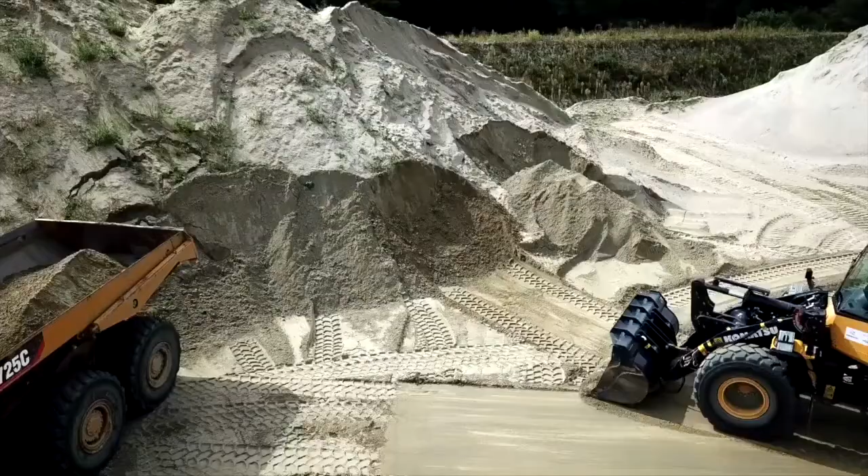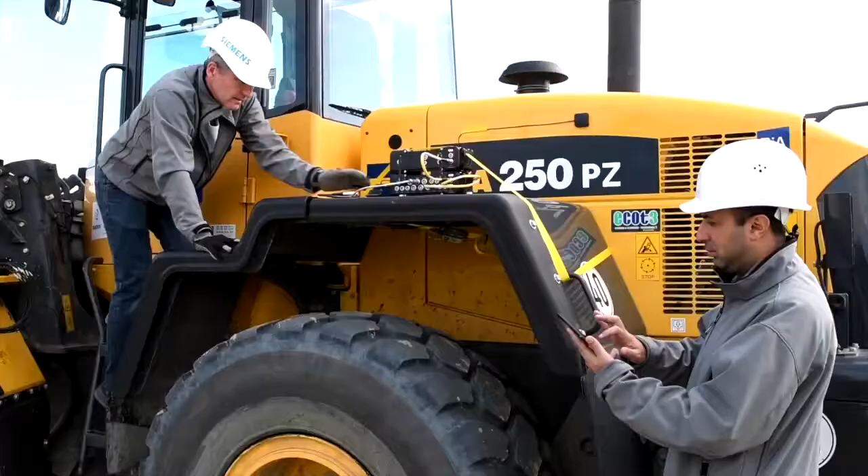Engineering for durability remains a priority for heavy equipment manufacturers. And yet, over-designing is not an option. On the contrary, it may blunt your competitive edge in an industry where equipment productivity, operability, safety, comfort, energy efficiency, and cost of ownership matter. So how do you balance all of your customers' requirements while still offering superior strength and durability?

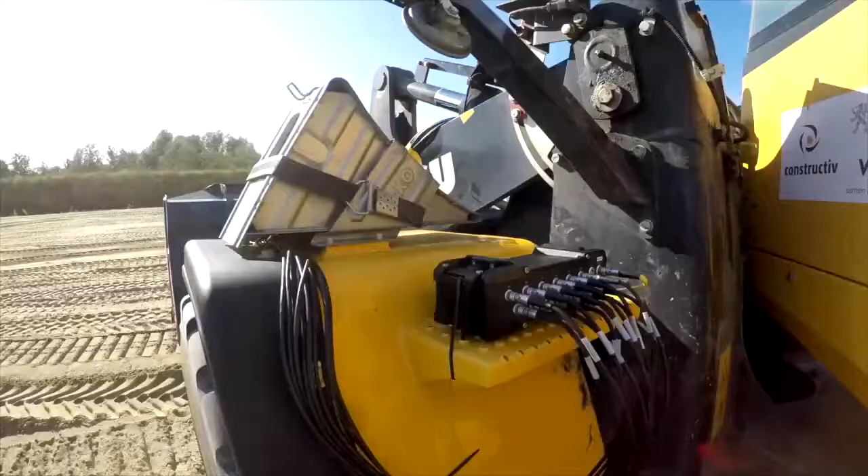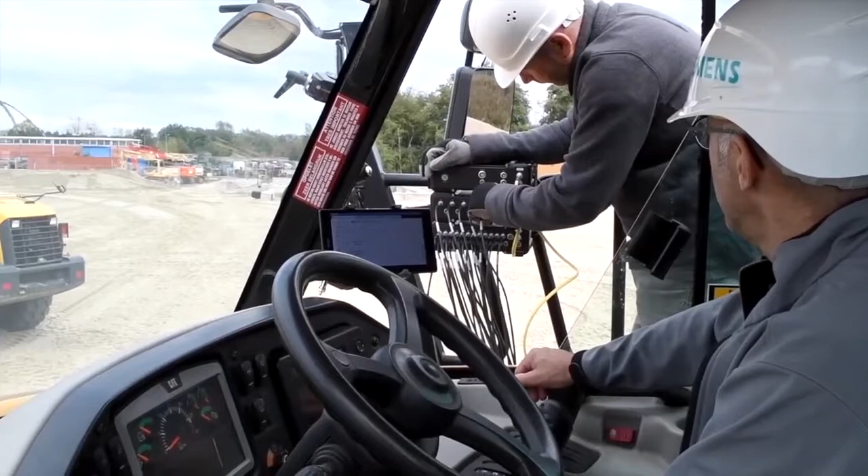An industry-proven process couples test and simulation to address this dilemma. It helps to resolve conflicting issues earlier on and at a lower cost. It starts and ends with accurate data. First, you need to acquire real operational loads in the most extreme conditions. You want to connect the ruggedized data acquisition system to the sensors and start capturing the real-world data that will serve as an input for virtual and physical validation.

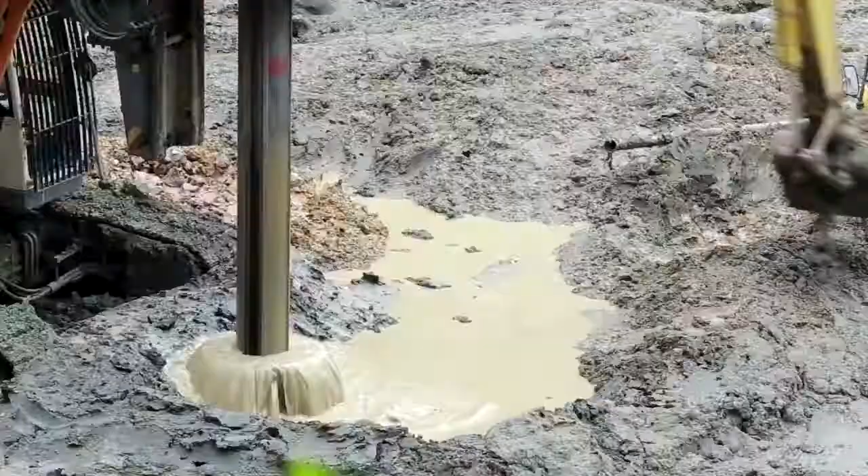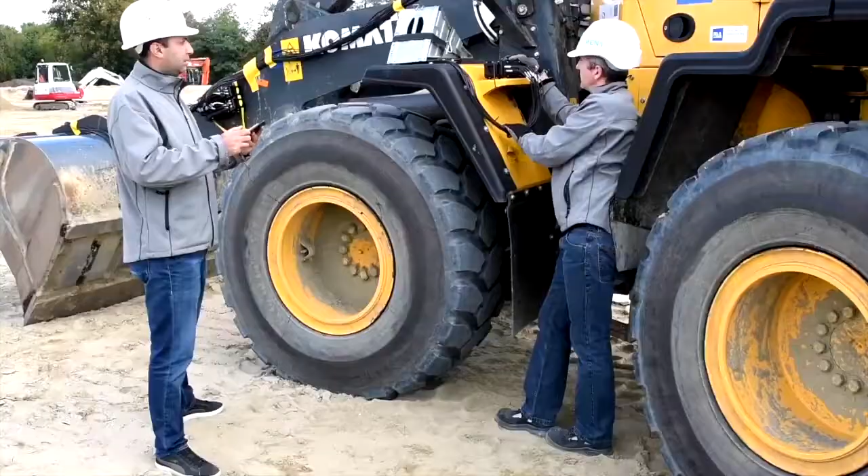Rock it, shake it, splash it, dip it in mud. Your data is always safe and ready to use. No test reruns needed. A set of embedded methods, such as automated data cleanup and on-the-spot analysis and reporting, allows for in-the-field validation. You can optimize your testing schedule right there, right away.

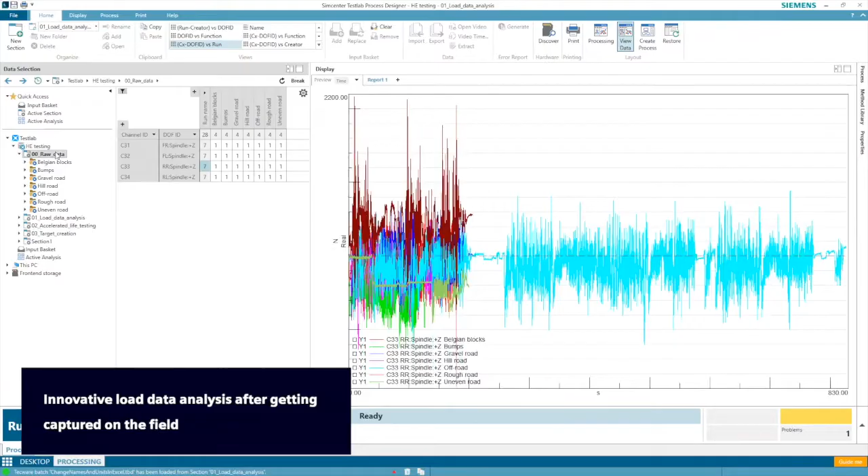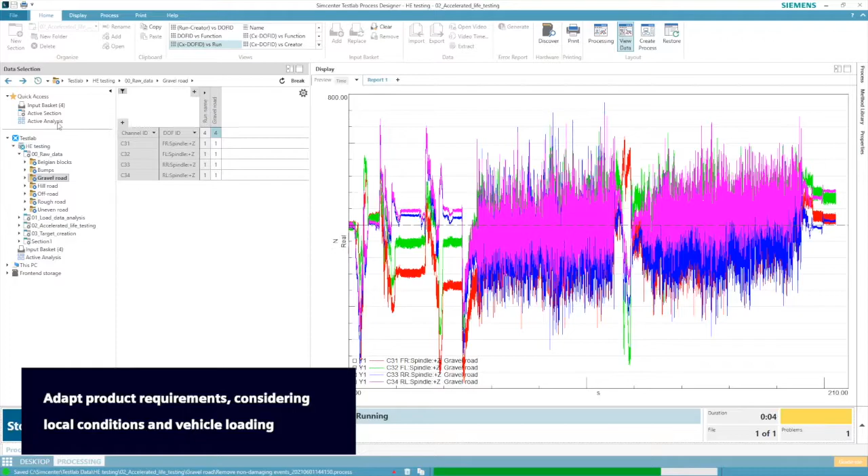Rely on load data mining services to define realistic and customer-correlated durability targets and procedures. This allows you to design accelerated test procedures that account for geographic differences and to adapt product requirements considering local conditions and vehicle loading. Fatigue analysis is an important step in the process.

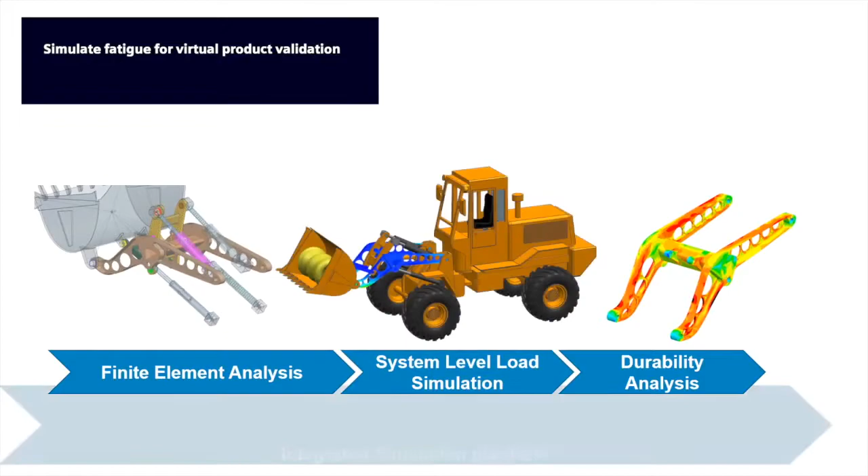It supports virtual product validation. A simulation-based durability analysis helps to identify weak spots within the structural design in order to optimize it. The analysis follows a workflow that starts with pre-processing via multi-body simulation to obtain realistic loads and ends with advanced durability studies. All steps are integrated into one engineering platform.

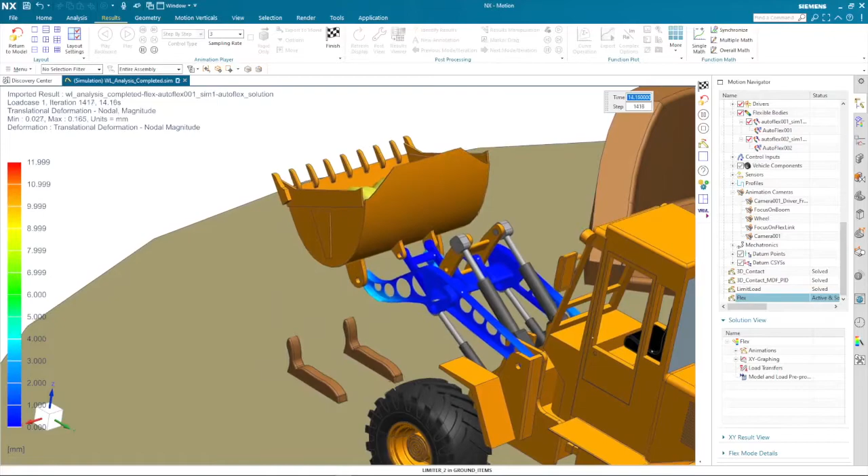To maximize uptime and minimize maintenance costs, you need to prevent physical component failure. Don't limit yourself to determining the average remaining lifetime based on statistics. Instead, quantify the remaining useful lifetime of components, subsystems, and machines under their specific real-use conditions.

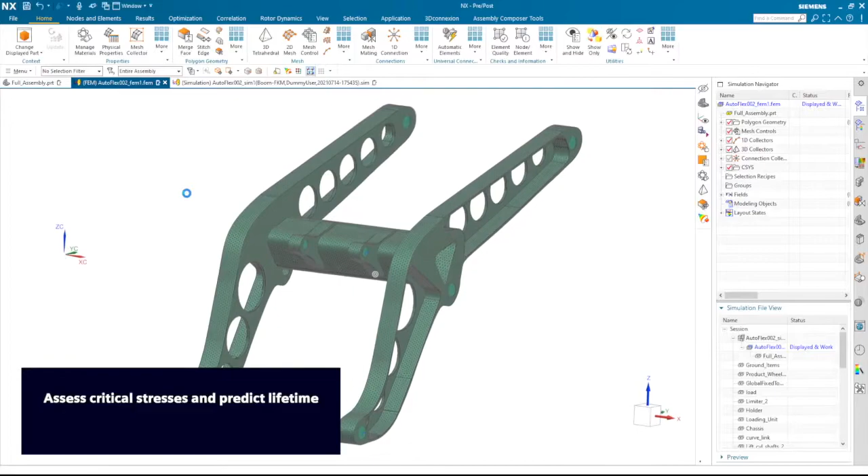By cascading the loads predicted on full system level down to the subsystems and components, you can precisely assess critical stresses and lifetime behavior. Simcenter experts can also help you target preventive actions to deal with a predicted failure by connecting real data with system simulation or CAE 3D simulation in a digital twin.

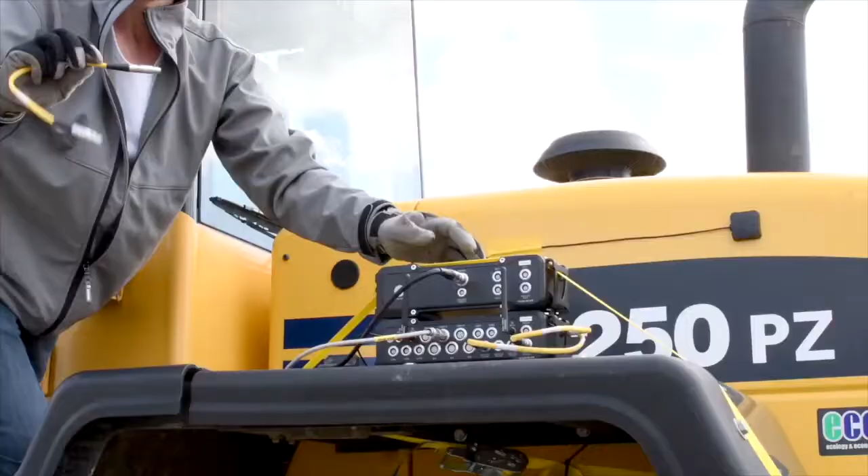Lab and field testing complete your engineering process. Accelerated testing shortens development and testing time and drastically increases the return on investment of expensive testing facilities. You can either test a single component from your structure, or you can test the whole machine with realistic test scenarios in repeatable environments. With Simcenter, you rely on a trusted end-to-end solution, encompassing all steps of durability engineering.

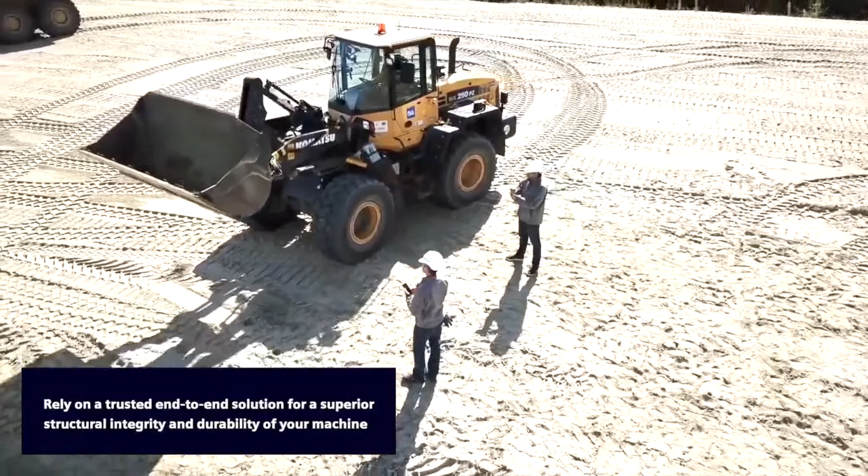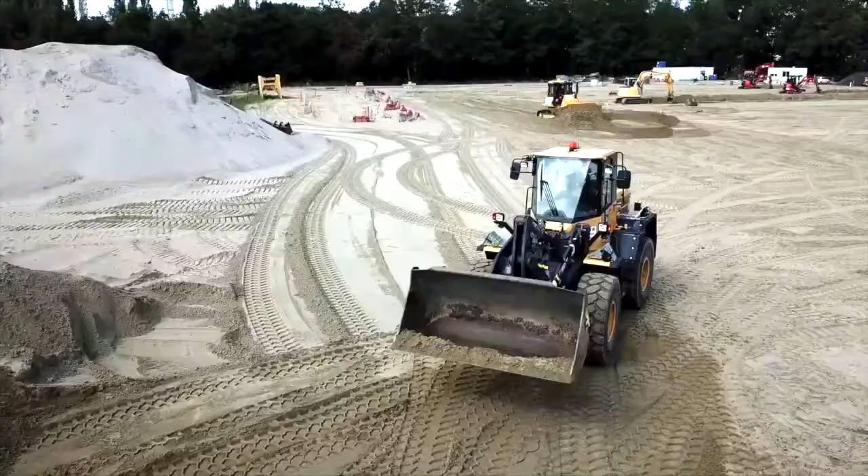Seek a true hybrid way of engineering and offer your heavy equipment superior structural integrity and durability. Tough. Tougher. The toughest. Unleash the powers of an industry-proven durability engineering process on your heavy equipment.